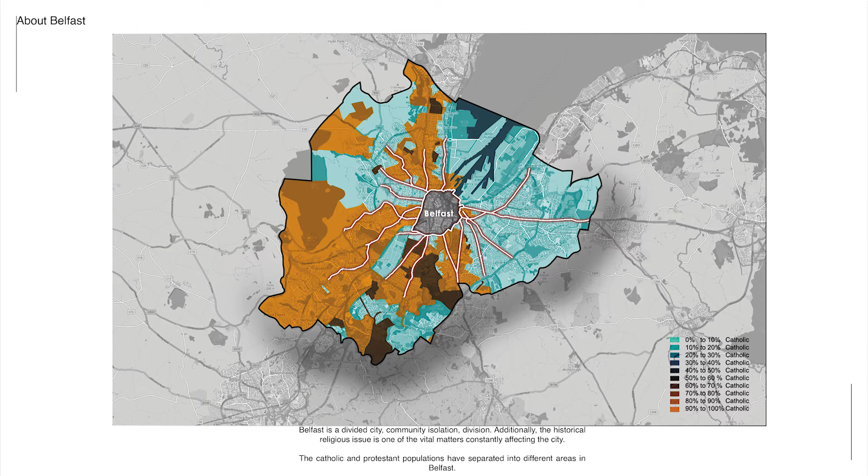Throughout this whole semester, what I find intrigued me the most in Belfast is the exclusionary residential territories and the alleyways. In the past, alleyways were used as an escape route for surveillance from enemies. But now, it has become a dark and underutilized alleyway in Belfast. It has always been a negative space, full of antisocial behavior.

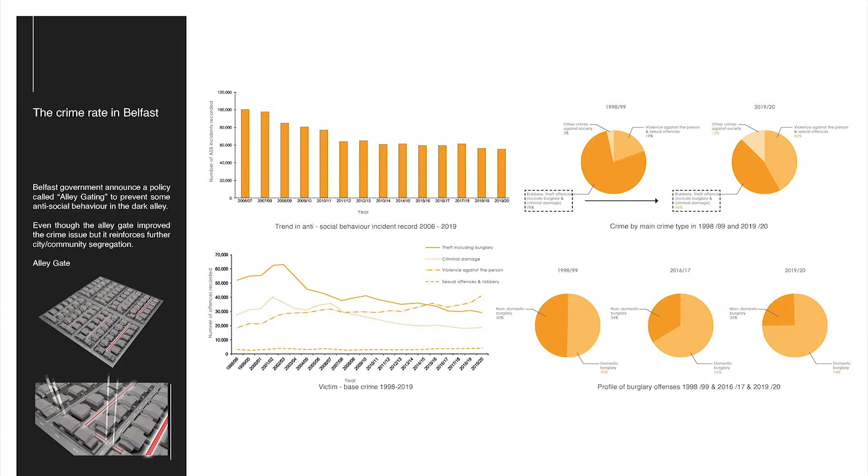So the Belfast government announced a policy called alley gating to prevent antisocial behavior from happening. Even though the alley gate improved the crime issue, it reinforced further community segregation, and has led the alleyways to become a physical and invisible barrier between people and their communities.

My project is called the Penetrations of Alley. The aim of the project is to break the physical and invisible barrier between people and communities by reactivating and repurposing the alleyways. With that, the intervention is able to reconnect the people in the city.

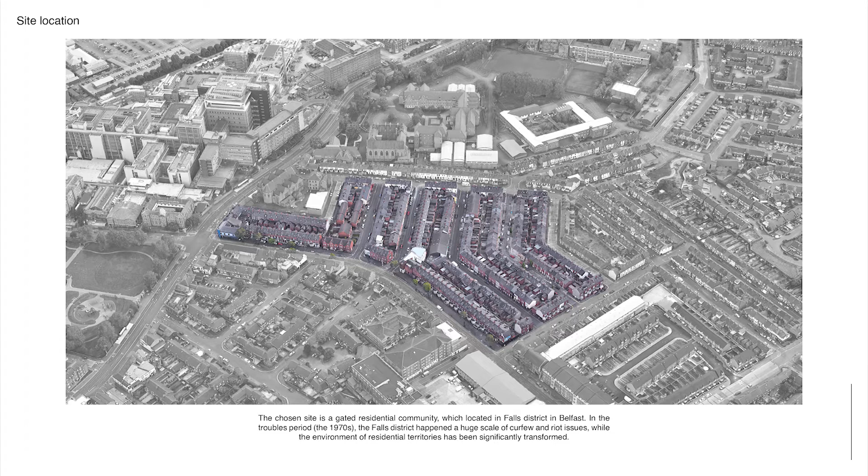The site is located at the Falls District in Belfast, where it is a gated residential community. In the 1970s, during the Troubles period, the Falls District experienced a huge scale of curfews and riots, where the environment of the residential territories was significantly affected.

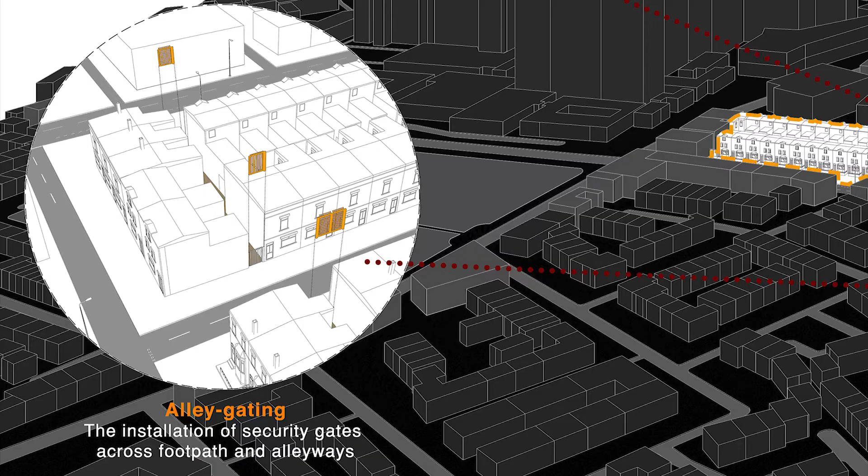Within the site, there are around 800 people living in 2 to 3 story high back-to-back terrace houses with the back alley. The entrance of those alleys has been installed with a gate. They even created a breeze wall to protect the communal space.

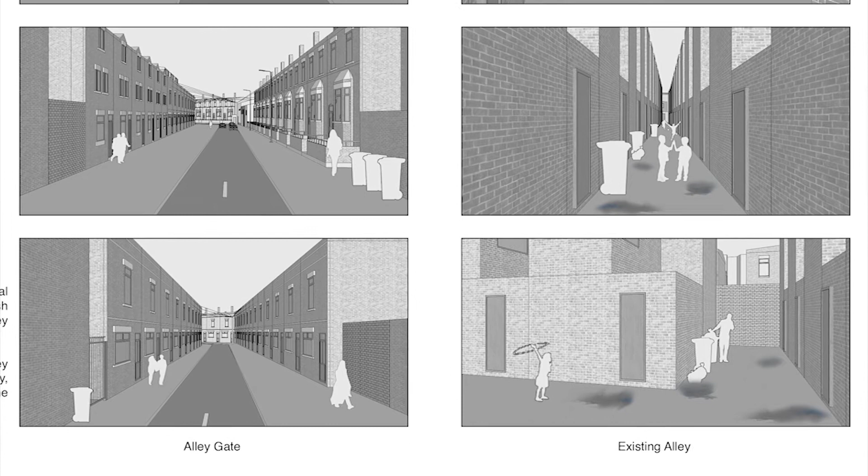Currently, the condition of the alleys has really bad sanitation and is always obstructed by rubbish. The alleys have puddles of water after the rain. Simply put, the only function of the communal alleys is for people to dump rubbish and for children to play.

These animations portray the evolution and scenes of the alleys throughout my research and design, and also the project visions.

The first part of the animation is the design of the Infinity Room, overlaid with the Civil War period Belfast, which represents the infinite barrier and distance between the people and their communities.

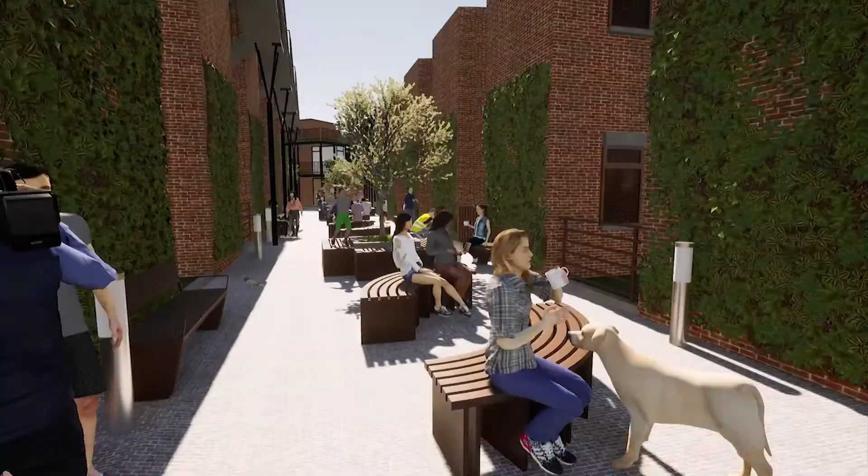The second part of the animation is the design and project visions of the penetrations of alleys. People will start to interact, breaking the barrier between each other.

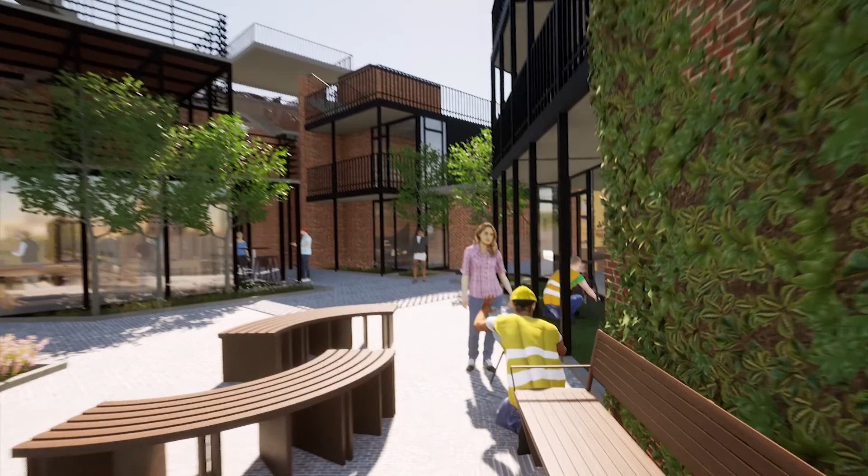The idea and concept of the design propose a permeation-through-box approach, creating new alleys crossing the communal space, residential area, and community facilities to activate the whole community.

Apart from the new alley approach, we propose repurposing the existing houses as community facilities, which is able to create opportunities for people to come together and have interactions.

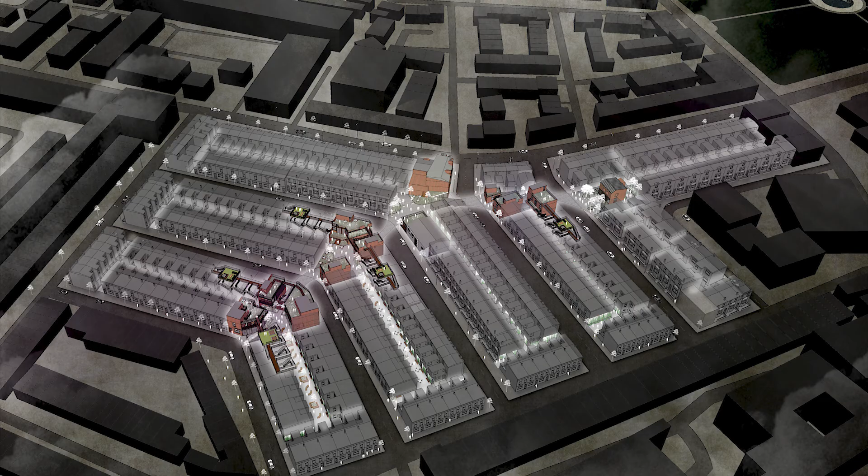So here is the overall view of the whole project. The building program includes a repair cafe, skill learning centers, community kitchens and restaurants, and also a landscape design for existing medical centers, Irish language learning centers, community centers, and a community garden house.

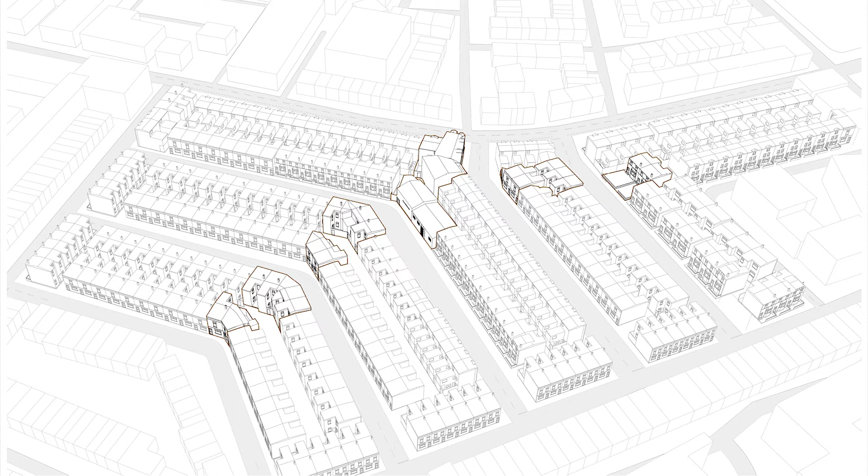In the design development process, first the site was selected as a natural part of the residential area. Second is the idea of opening up connections to the different neighborhoods. So I decided to select the middle part of the house to demolish, and then apply the idea of a new alley to connect different neighborhoods and the existing alleyways.

After that, we propose the existing houses as community facilities, considering the purpose of the site, and situate the program into different locations.

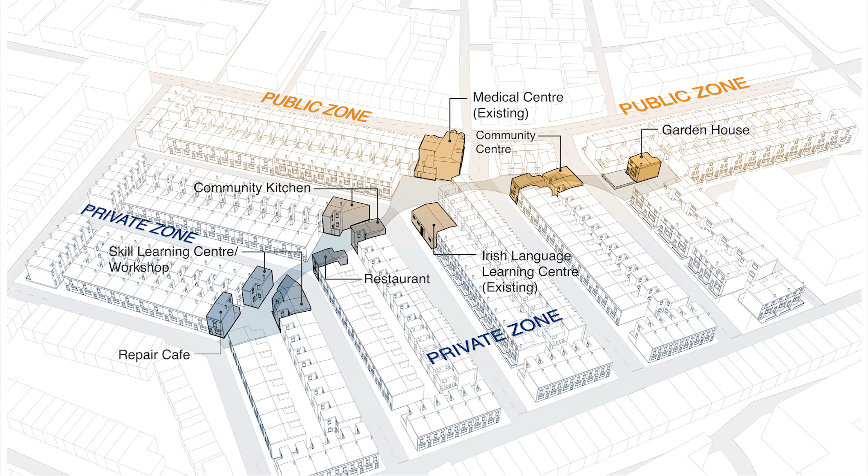The green element is also an important medium to bring life into the communities. It will include a green roof and green balconies to the community facilities, also as a new pointer to the new alleys.

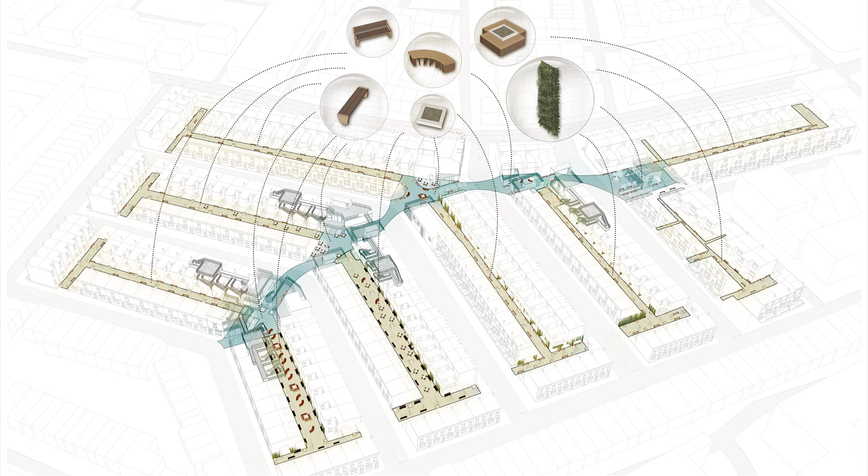The idea of private roof gardens could enhance the visuals of the alleys and elevate the communal space with further interactions. Finally, urban furniture and vertical green walls are situated in the existing alley and the new alleys to elevate the dark communal space.

With all this coming together, the penetration and intervention of the communities will begin.

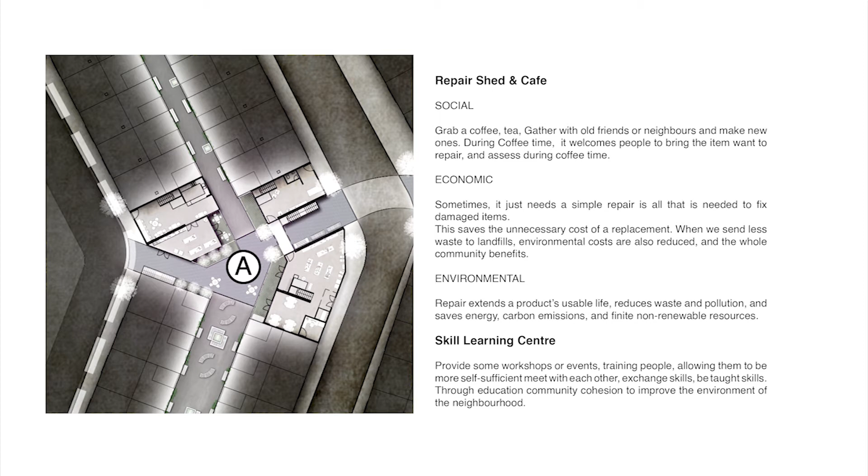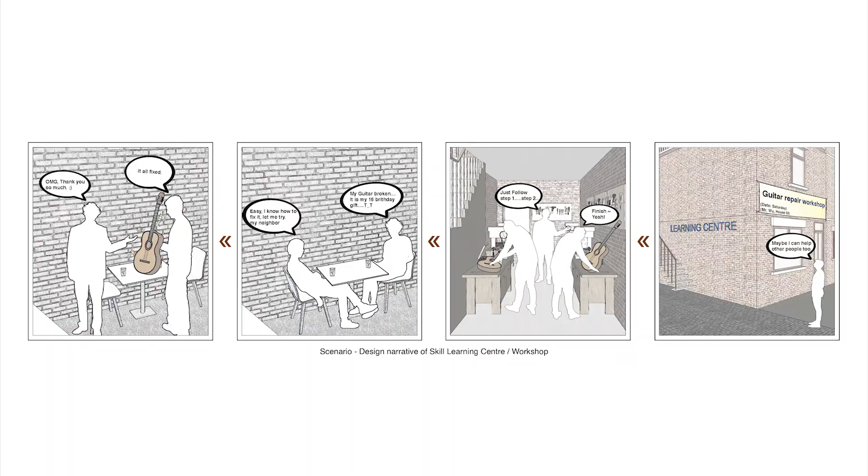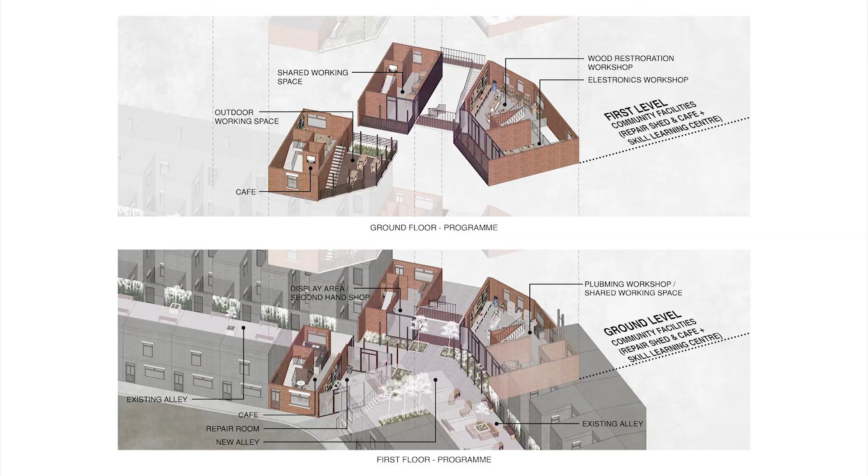Moreover, they both have a communal roof garden that creates a leisure space for the communities. It connects to the private roof garden as well, with a small security fence. There are two types of private roof garden: one is only for people to relax and gather, the other provides a planting function like growing vegetables to share with their neighbors.

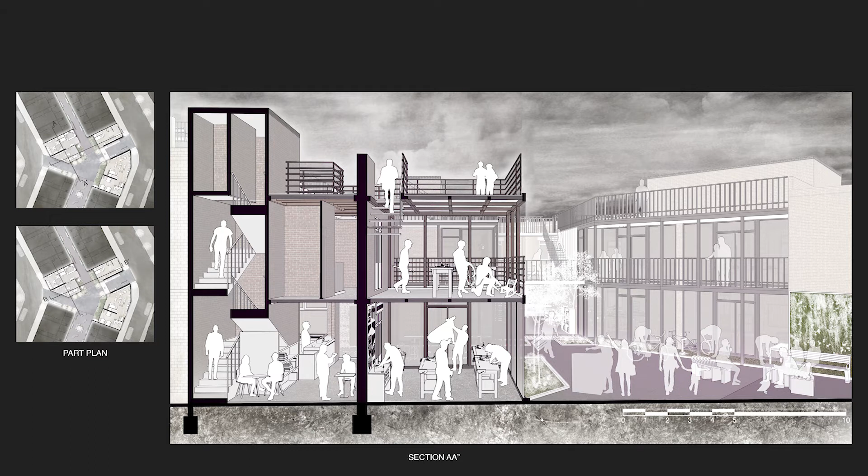So there are two sectional perspectives that show the actual activities and the spatial quality of the Repair Cafe and also the Skill Learning Center.

About the technical design approach, after the selective demolitions, it will generate much construction waste, recycling and reusing some of the materials like brick and timber as part of the construction material. For example, recycled brick is reclaimed as new paving blocks for the new alley and the existing alleys. Some of the timber joists can be reused for urban furniture design.

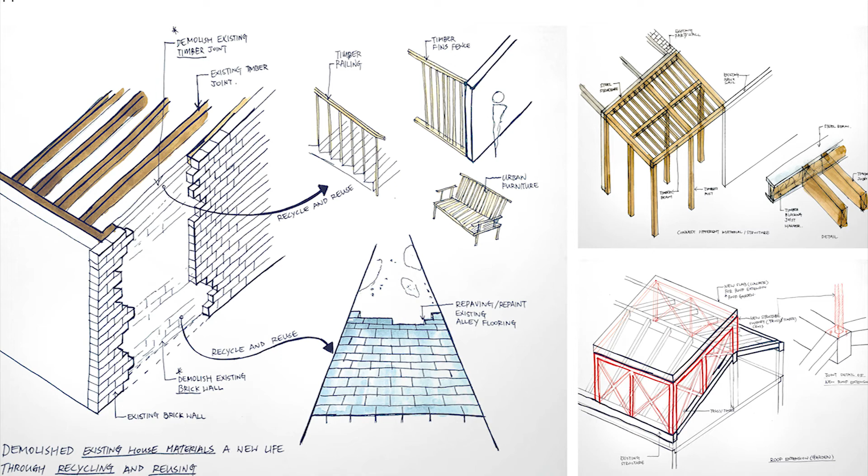For the structure, it will basically maintain the existing party wall and propose new steel structures and timber structures for additional support of the new elements of the building.

Okay, let's imagine together: after a few months, the new alley penetrates into the existing alley and people start to occupy it. How does the community look like? Look at this—all the visible and invisible barriers will be broken down. People start to occupy and bring it to more life.

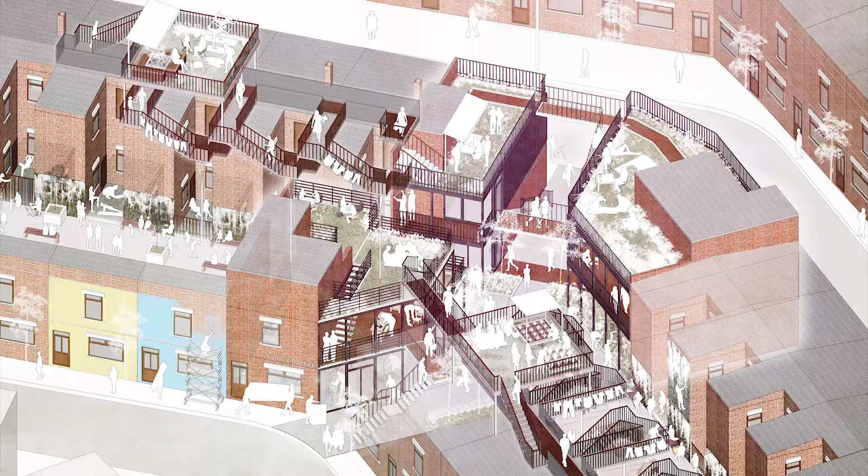See, repair and refine the communities, helping each other, doing exercise together, playing music with the neighbors. The kids use it as a playground. They even have a picnic on this communal roof garden.

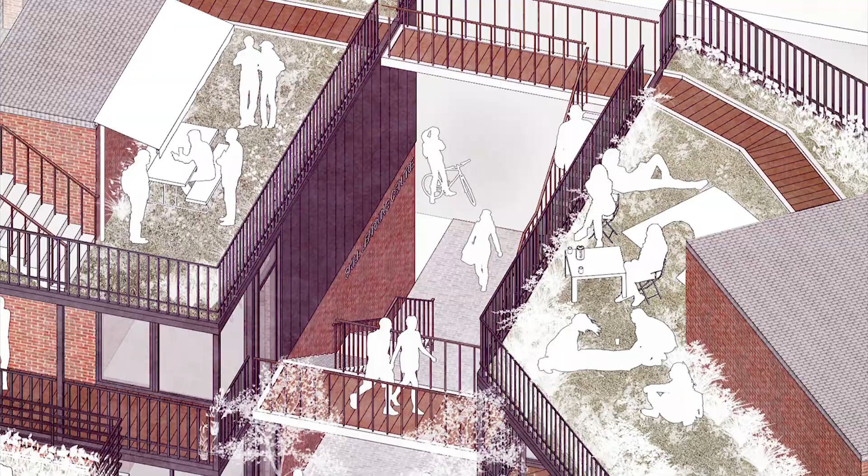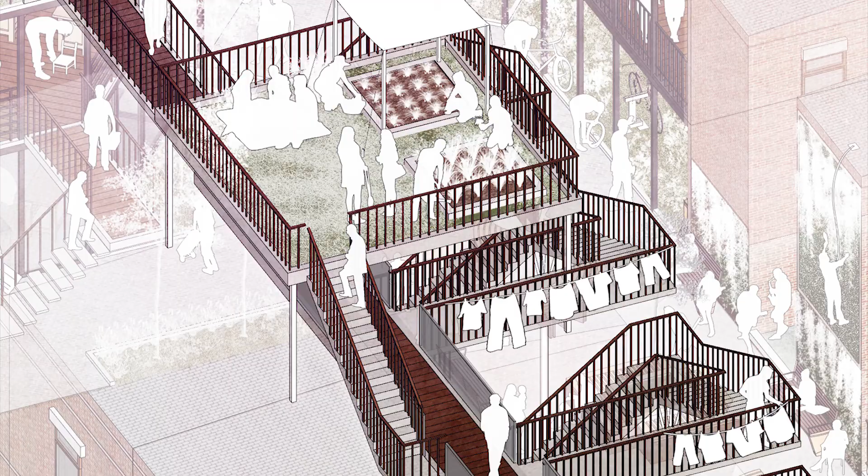Let's see the private roof garden. People use the staircase and railing for drying laundry. People do BBQ on the rooftop, and also grow vegetables on the rooftop as well.

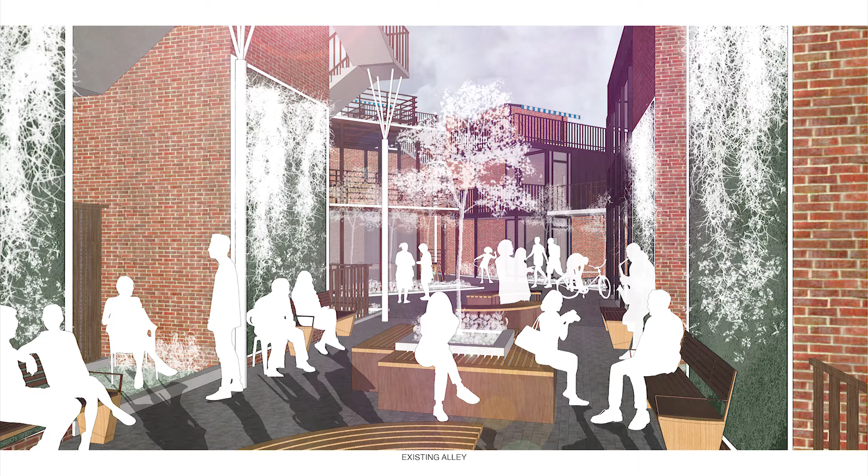So you can see here the junctions of the new alleys and existing alleys, and also the new community programs interacting with each other as people occupy it.

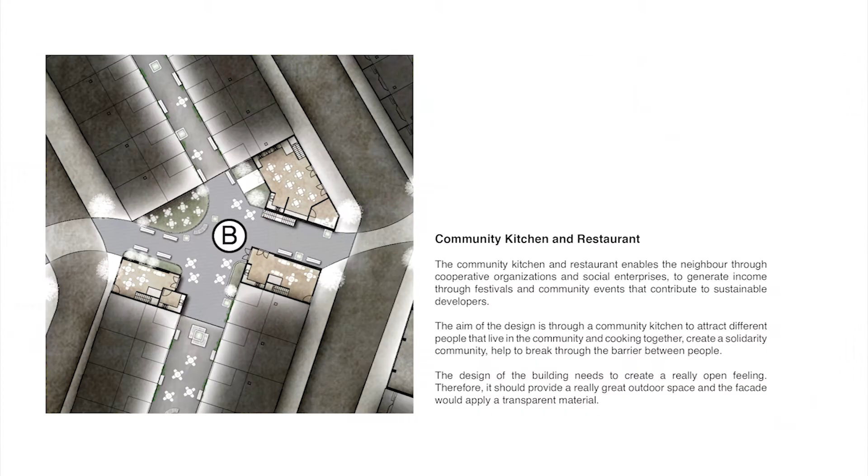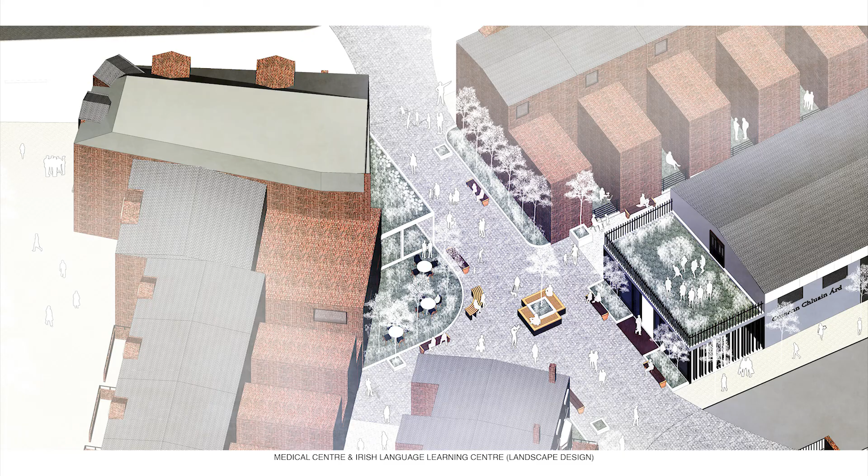Before the end, I would like to quickly show the design and images of another function of the program and how it brings different life into the communities and alleyways. You can see here the community kitchen and restaurant, new landscape design for the medical center and Irish language learning center, community center, and a community garden house. Different functions and programs will bring different life into the alleys.

In the future, the whole project will start a new page of transforming the existing residential territories into a model of domestic life, breaking down the walls between people—that is, the divisions.